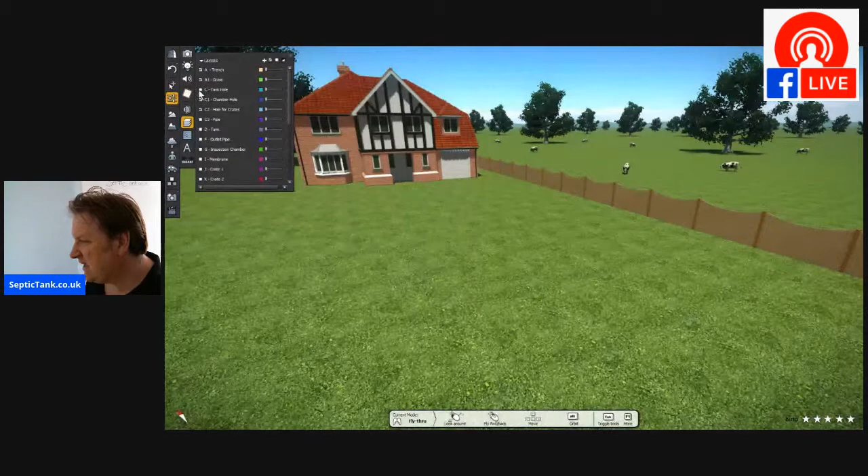So the first thing you need to do, if this is your property, obviously you're going to have a soil pipe somewhere on your property. And the soil pipe basically is where all the wastewater comes down. So first thing you've got to do is dig a trench, and that trench will literally go up to your soil pipe that comes from your house.

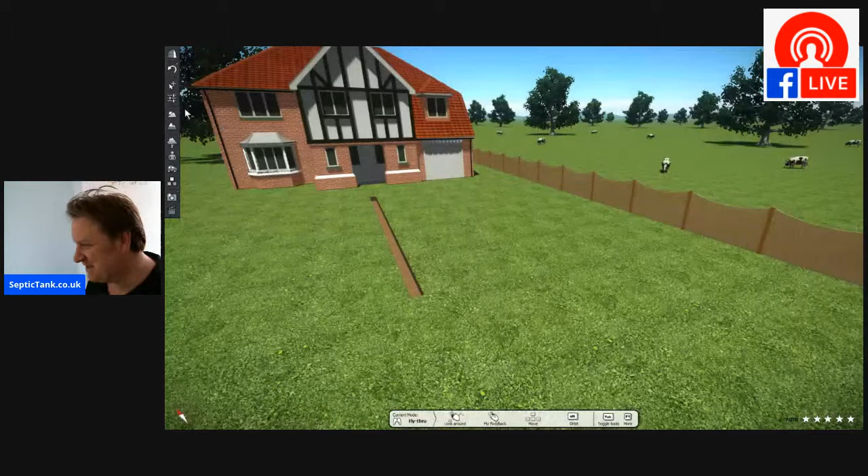All right, so determine where you're going to locate your septic tank, connect the pipe, the trench, up to the soil pipe, okay? Then the next thing, once you've done that, is you just need to dig the hole where you're going to locate your septic tank. So let me show you how to do that. Ba-da-ba-bam, there we go. Look at that. So with your digger, you just need to dig a small hole.

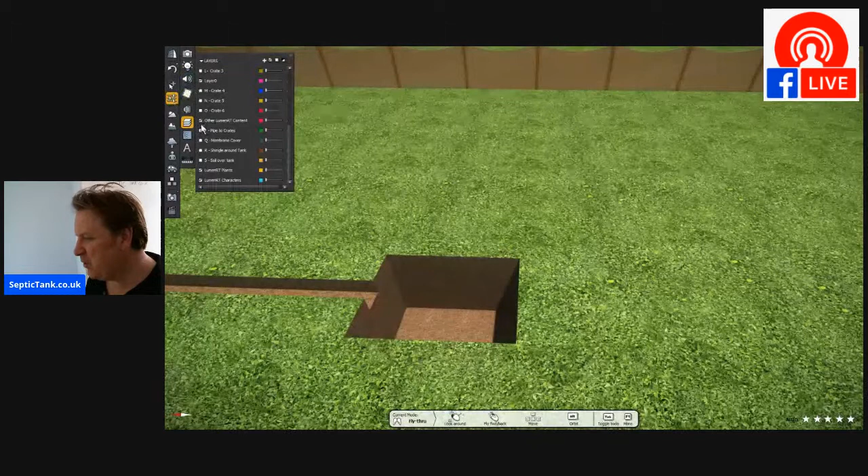Why do I say a small hole? Well, because the septic tanks that I'm going to be showing you now are low profile septic tanks. They're shallow septic tanks. Let me give you an example of what I mean by shallow. So let me just take away this grass section here. I've just taken this grass away for illustrative purposes. So the septic tank in this example I'm going to use is a shallow one.

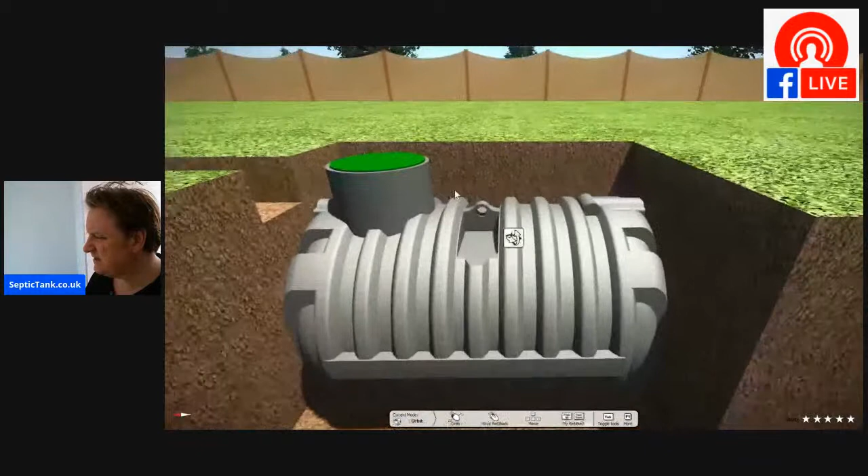Now, there's tons of different septic tanks on the market, which you probably know yourself. You can get onion septic tanks, those big onion septic tanks and stuff like that. So there's loads and loads of septic tanks on the market. But for me personally, some of the best scientific breakthroughs that have been made in the last 2 or 3 years with septic tanks have come in the form of these low profile ones.

Now they're almost like bullet shaped tanks, right? And they've got ribs on them. So they're very, very strong, but they're very, very shallow and they don't need concreting in. And for me personally, I love these shallow tanks because they just take about 40 minutes to get in the ground.

So there you go. So you've dug a small hole, all right? And what have we done so far? You've dug a trench and you've dug a small hole for your septic tank. Now, because these shallow septic tanks are so shallow, they make it really, really easy for a soakaway to go in the ground.

So let me show you. Again, there's loads of different types of soakaways you can put in, but in this instance, I'm just showing you a really easy septic tank and soakaway that's government approved and really easy to install. So let me show you this. After you've dug the tank hole, you've just got to dig 2 more little holes.

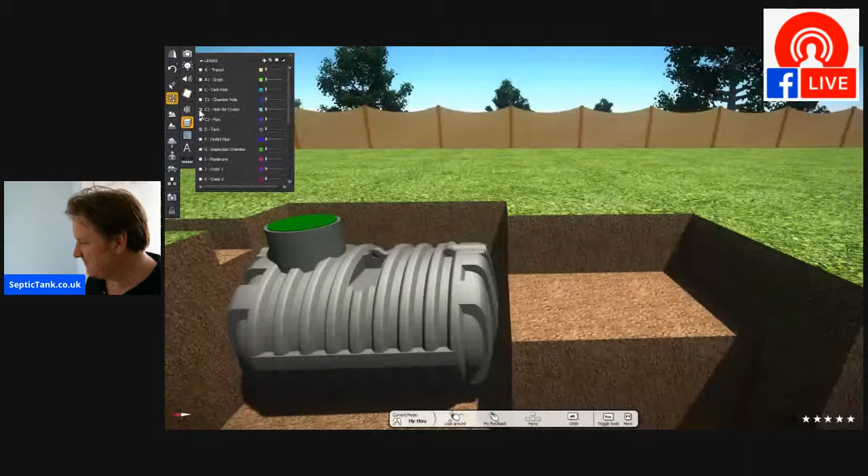So let me show you what this looks like. Let me put the grass back on and let me come out and show you. Okay. So when you've dug your holes, you can see they're really shallow. So what have we got? You've got your trench from your house that leads to the septic tank. You've got another hole here and another hole here. So what are these holes here for?

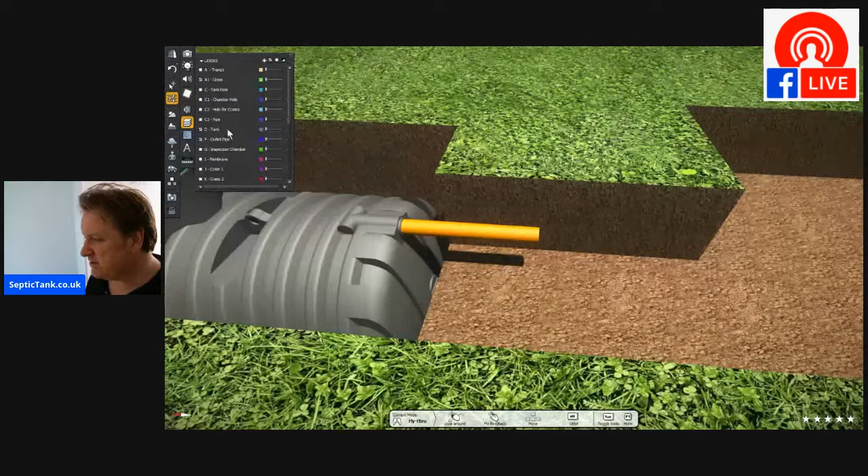Well, every septic tank has an outlet. So on the outlet, you've got to put an outlet pipe, which makes sense, doesn't it? So you've got your pipe. Let me show you something I didn't show you. From your house, you've got your pipe, which all your wastewater from your house goes down. From your bidet and your bath and your shower and your washing machine, it all comes down this orange pipe here into the septic tank.

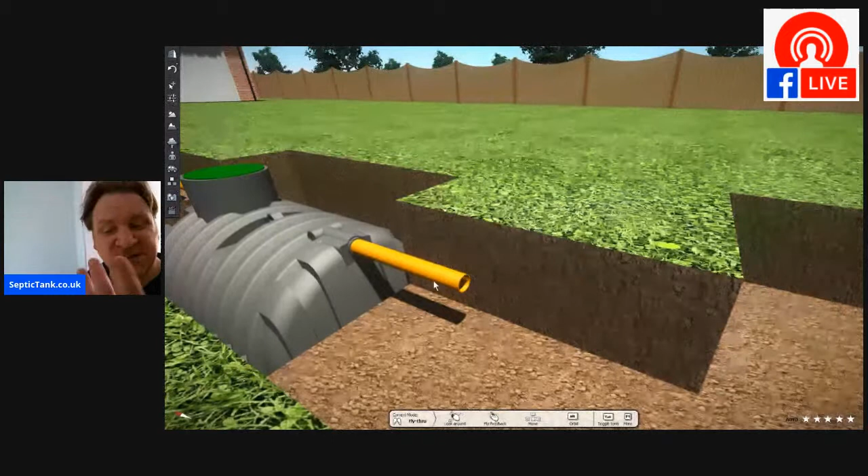And then all that wastewater is going to come out of this orange pipe here once it's all connected. So you connect your orange pipe here. And then the next thing you do is put what I call a German inspection chamber. Let's say any debris makes its way through the septic tank, like sanitary towels or baby wipes. You can actually put a septic tank filter in here and it traps all the debris. They're amazing, they really are.

So the next thing to do, and I love this, in this instance I'm putting in some septic tank soakaway crates. All you do is put down your membrane first, like so. And then you just lay your crates in the hole. They're really light, but they've got about a 20-ton bearing load, so you can put them under drives and stuff. In this instance, we've got 6 crates in this hole. You can get 8 crates, 10 crates, depending on the number of bedrooms you've got.

Now, once you've done that, you then just connect the pipe from the inspection chamber into the crates. Look at that. Now, how simple is that? All that I've just shown you will take you about 2 or 3 hours to do.

Now, I just want to put a rider in here. Many people think that you can't use septic tank crates for a soakaway. People ring me up and say they've read on the internet you can't use crates for a soakaway. No, you cannot use rainwater crates for your septic tank soakaway. You have to use septic tank soakaway crates. So that's where the misinformation comes in.

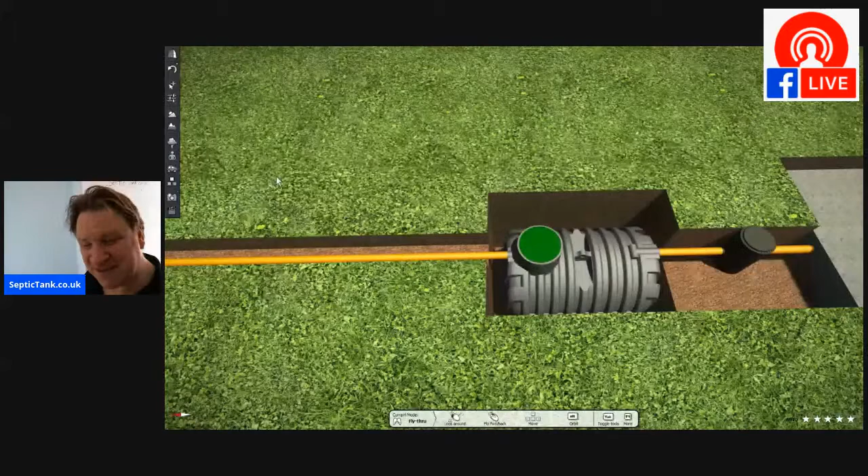So put your septic tank crates in, and then all you do is cover the septic tank crates with membrane, just like that. And there you go, I'm not kidding you. So let's just look what we've done. You've got your entire septic tank in, in just under 3 hours.

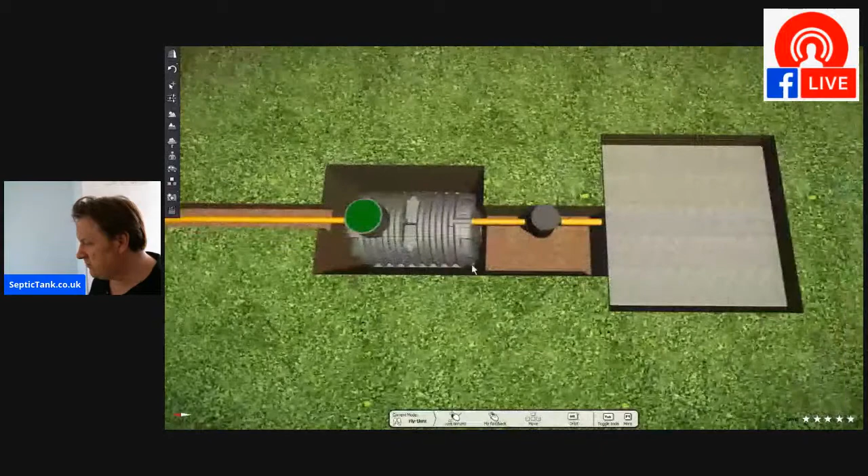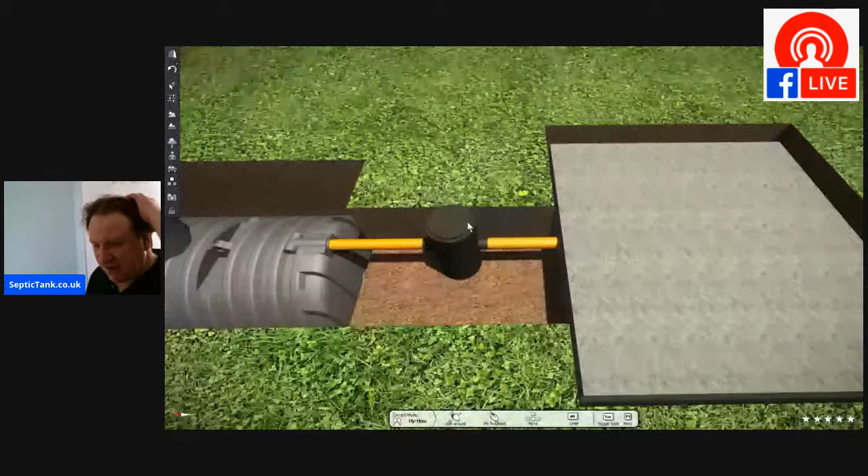Let me just zoom out a bit. So there's your house. Here's your trench. You've dug your trench and you've put your pipe in. Your pipe goes to your septic tank, then you put another little outlet pipe in, then you put a German silt chamber in, a manhole chamber, and then you put your septic tank crates in, and that's basically it.

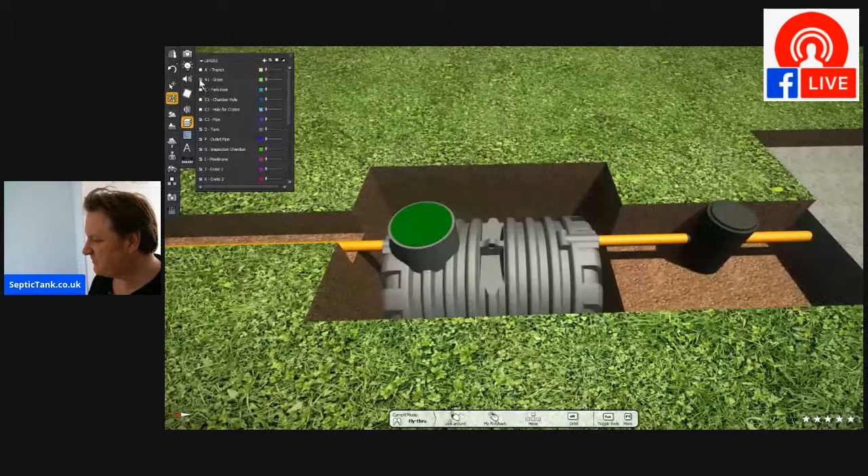Now, remember I was saying many septic tanks, like the onion tanks, you've got to concrete them in. But the beauty is with these low profile tanks, they don't need concreting. You've just got to backfill them with some 20 to 30 mil shingle in and around the tank. Look at that. How long does that take? Maybe 15, 20 minutes to put the shingle around it.

And then this is the best bit. Let me just put the grass back on so you can see what I'm doing, and zoom out a bit. Okay, so there you go. There's your tank with your shingle in.

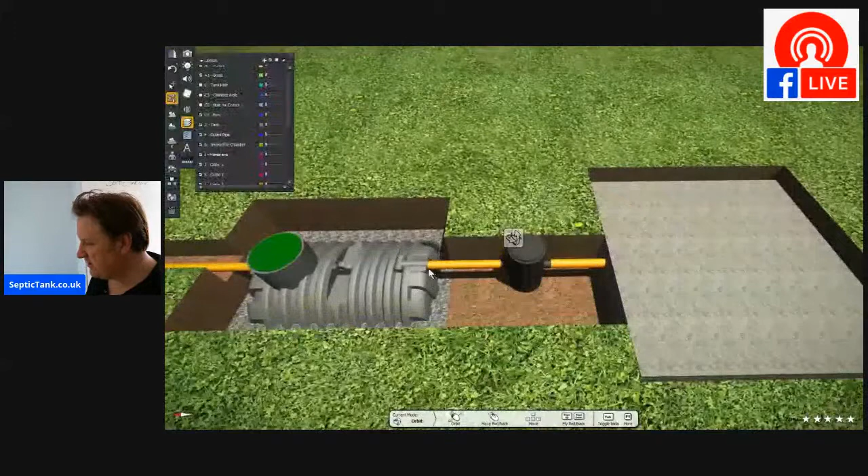So literally you just put the soil over the crates like so. You fill soil in around the inspection chamber. Then you just cover the tank over with soil like so. And then last but not least, you fill your trench in. And so within 3 hours, you've got your entire septic tank and soakaway in.

So bam, that's how amazing it is. Now, as I said, there's loads of septic tanks on the UK market today. As I said at the outset of this video, you'll get quotes for 6, 10, 15, 20,000 quid to put a septic tank and soakaway in. Well, the one I've just showed you is one that I've got on my site that is very, very popular. Again, obviously do some research before you put your own septic tank and soakaway in. But at the end of the day, I'm just trying to help you. I'm just trying to give you some pointers so you can save some money and put a septic tank and soakaway in that's fully legal.

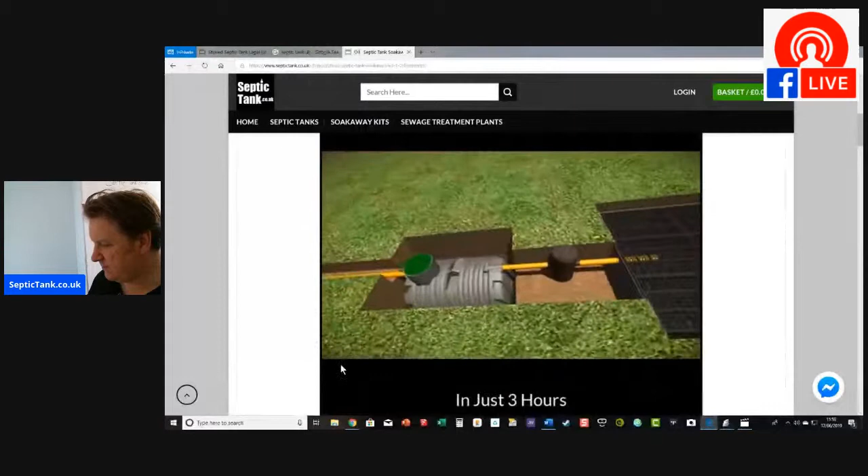But let me show you what you're getting. You're getting all the pipe work. You're getting 5 times 3 meters of orange underground pipe work, so that's like 15 meters, and they all come with the connectors molded onto them. You're getting a German inspection chamber that you can put a filter in, which will save you hundreds and hundreds of pounds.

Because many people don't put an inspection chamber in between the septic tank and soakaway, and people unfortunately flush things down the toilet they shouldn't, like nappies, sanitary towels or baby wipes, and they get stuck down there. And so you can pay Dyno-Rod to come dig up the pipes and charge you 800 quid or 1,000 quid to do it. Some people may have insurance against blockages, but they'll still have to wait a week or 2 for Dyno-Rod to come out, in which time they'll be having to spend 200-300 quid a time every couple of days to get their tank emptied. So these German inspection chambers really do save you a lot of money.